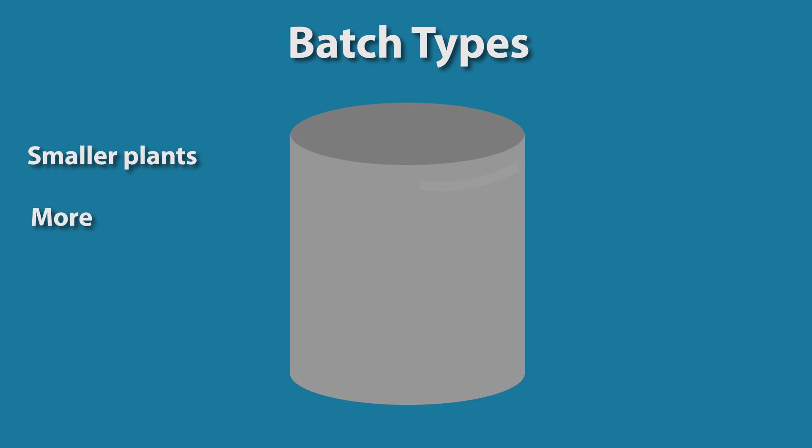Biodiesel production methods have evolved over the past 30 years from batch types to semi-continuous flow arrangements to true continuous flow schemes. Batch type methods continue to be used and are still very active, especially among smaller plants. Typically, more person-hours are needed per gallon for batch type systems than those for semi or continuous systems, but batch systems are low-cost, flexible, and easy to start up and shut down.

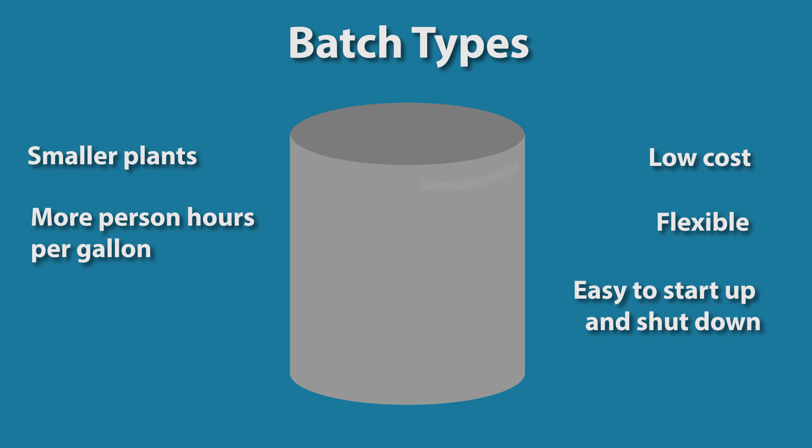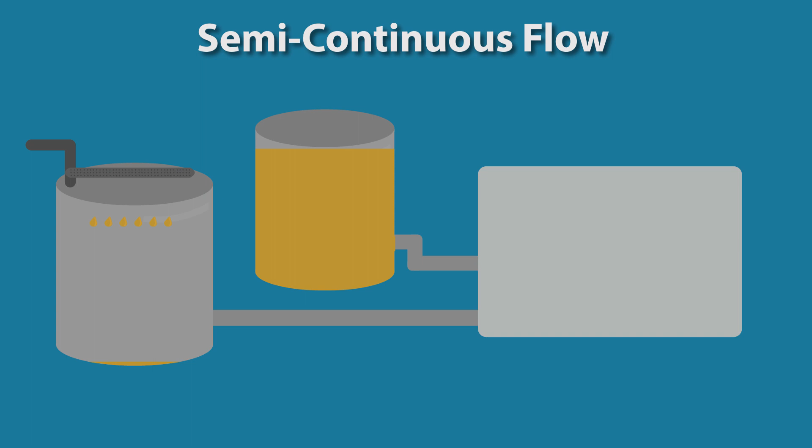One modification of the batch plant uses 2 reactors with 1 or 2 larger settling tanks. This could be described as semi-continuous flow. While one batch is reacting, the second batch is being prepared. When the first one is fully reacted, the contents are pumped into the settling tank, then the next one, alternating between the two until the settling tank is full. Subsequent batches can be placed in a second settling tank. Separation and purification are accomplished during other work cycles.

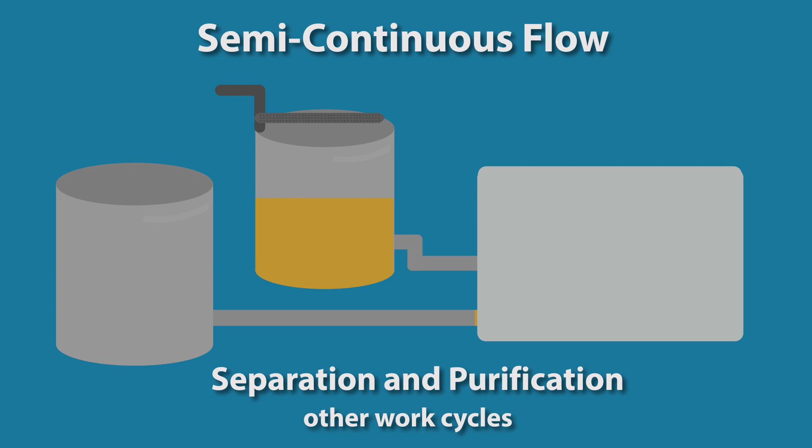A continuous flow system adapted from the batch process utilizes 2 continuously stirred tank reactors in series, where the reactants are fed in at such a rate that the mixture is homogeneous. As reactants exit the first continuously stirred tank reactor, they have time to settle while the glycerol is drained off, and the upper phase is fed into the second continuously stirred tank reactor along with fresh reactants so that the reaction is complete by the time the product exits the second reaction step.

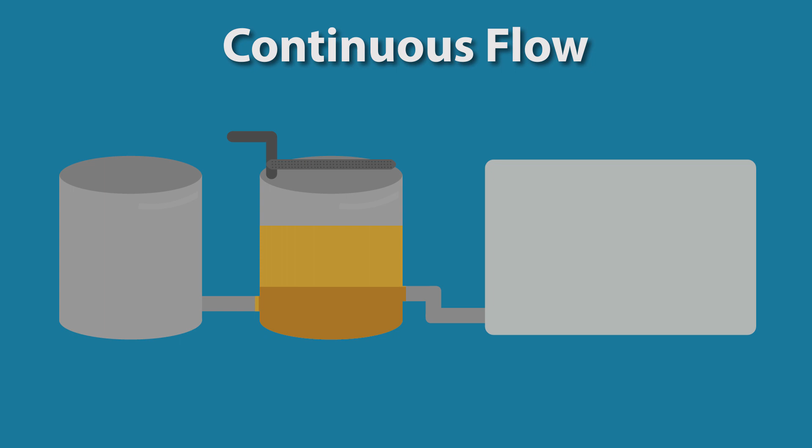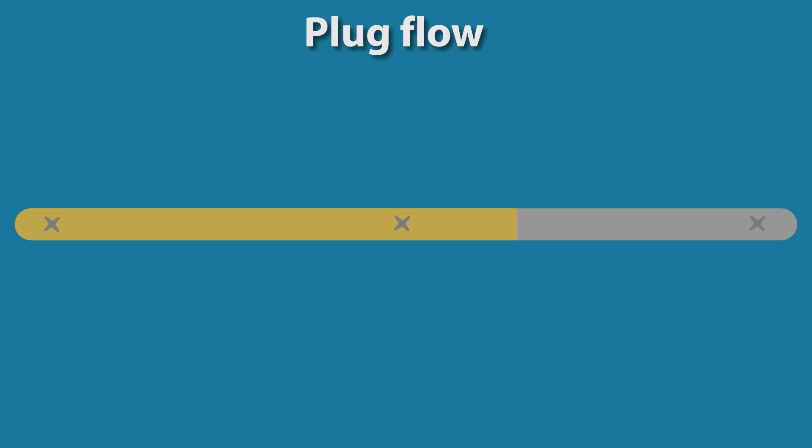Plug flow systems are set up to feed reactants at optimal rates and to push the mixture through pipes containing a series of static mixers. Some schemes make use of dynamic ultra-high shear mixers to speed up the reaction by mashing the reactants together by shear force and the action of cavitation. Ultrasonic units have a similar effect to high shear mixers, but have no moving parts and are credited with super fast reaction times at high flow rates.

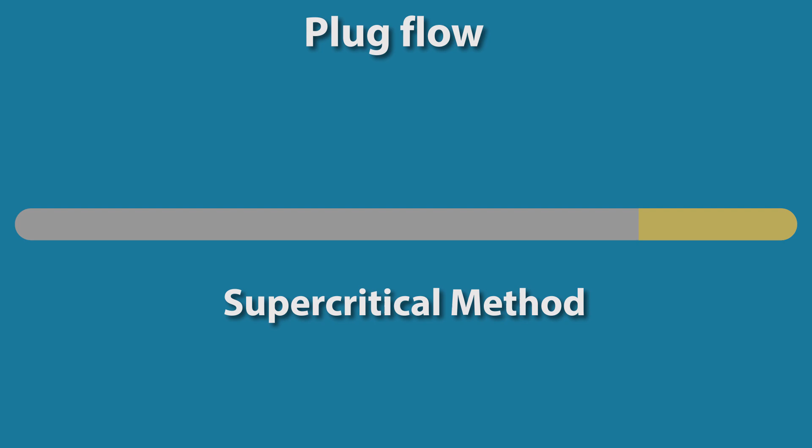The supercritical method relies on very high temperatures and pressures in the range of 350 degrees C and 1200 psi. Under these conditions, reactions happen quickly without the aid of a catalyst.

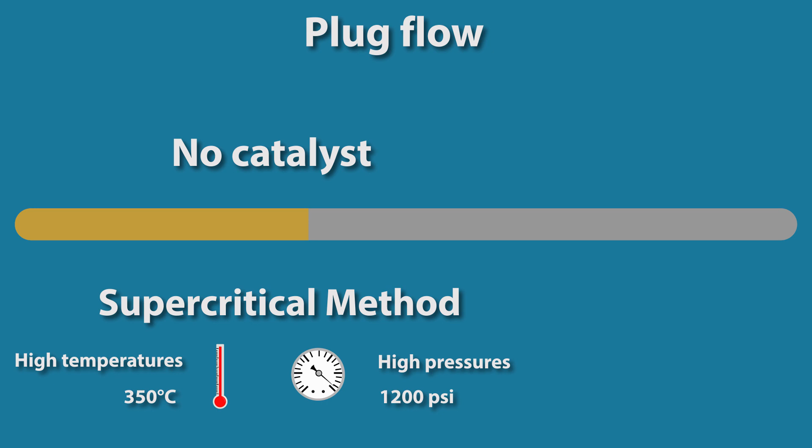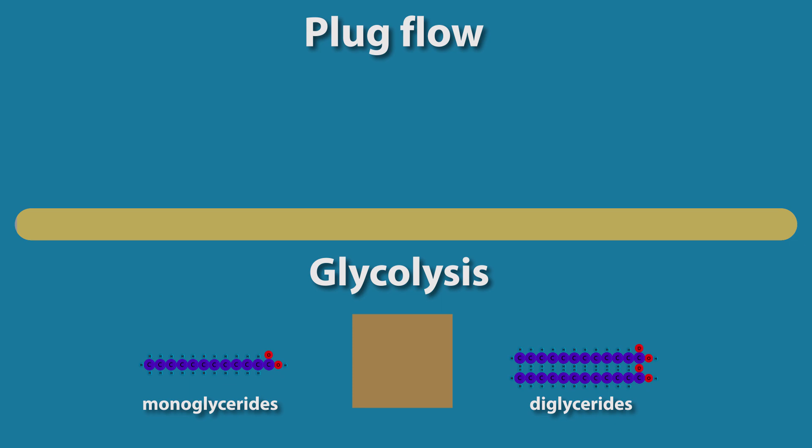Glycolysis involves combining the feedstock with glycerol and methanol at high temperatures to convert the FFAs into mono and diglycerides. This reaction, which yields pure water-free glycerides, is followed by a conventional base-catalyzed transesterification step. After separation, the glycerol is purified to be reused in glycolysis, while the esters are typically distilled to produce a high-quality biodiesel.

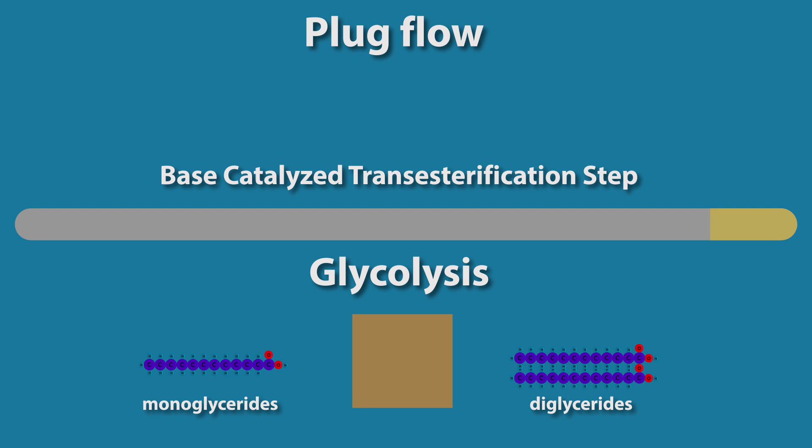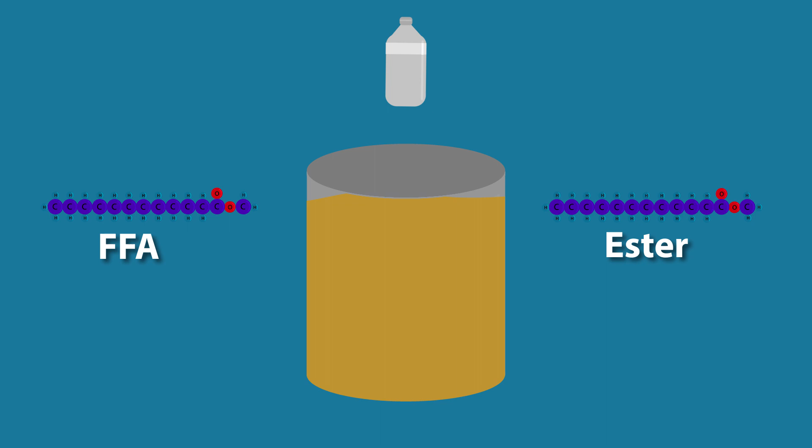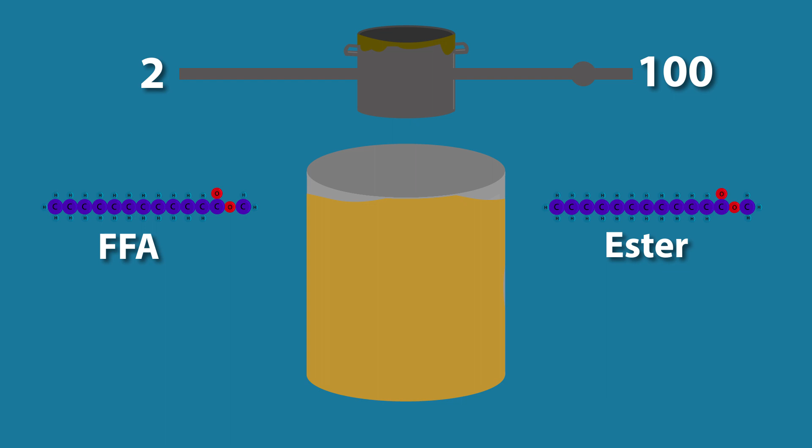Another method for utilizing high FFA material is to convert the FFAs to esters using an acid catalyst. This esterification step can be used with feedstocks with FFA content ranging from 2 to 100%, but is typically applied to oils and fats at the higher side of that range. This process can be followed by transesterification to complete the reaction.

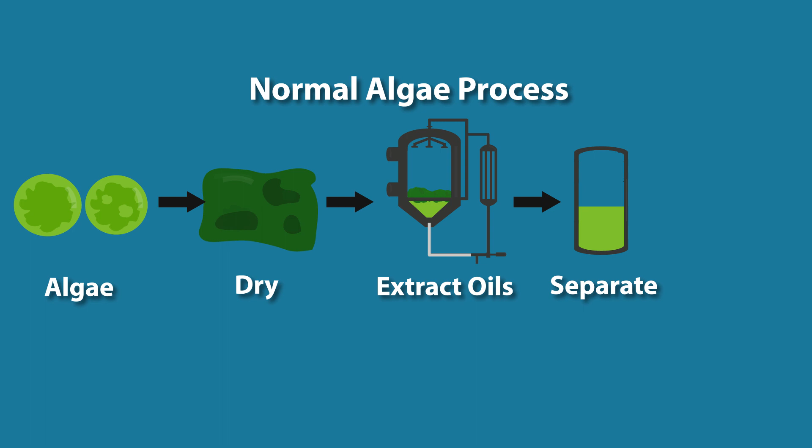Researchers at the U of I have been looking at in-situ transesterification of lipids in microalgae in sub- and supercritical methanol. In this high-temperature, high-pressure process, the FFAs and triglycerides are converted to biodiesel as they are being extracted from the biomass.